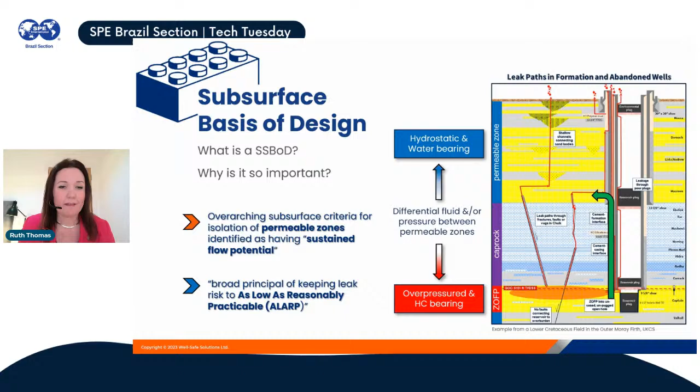So what are the regulations regarding the subsurface basis of design for abandonment? Well, actually, in short, there's very little. Most countries, as you'll probably be aware, have regulations regarding the integrity of wells in the context of the well life cycle, so that's from initial drilling all the way through to abandonment. But the maturity of specific regulations relating to decommissioning is generally linked to the maturity of the decommissioning industry in that country.

In the UK, well duty holders have to comply with the design construction regulations, which prescribe that we have to make sure that all wells can be safely suspended and abandoned with no unplanned release of fluids to surface. The OEUK, which is an organization which provides advice to the industry,

have developed guidance which is a bit more prescriptive in terms of giving advice around barrier lengths and means of verification of barriers. Whereas, as I believe in Brazil, the Resolution 46/2016 uses more goal-setting language around the objective of containment and using ALARP.

But all guidance that I've seen has fallen some way short of giving you a defined process in terms of how to conduct a subsurface review. So we'll take a look at that next.

So what are the steps? How long does it take? Well, generally, the duration of a subsurface basis of design for abandonment is commensurate with the complexity of the geology, of the wells, and also the availability or not of data.

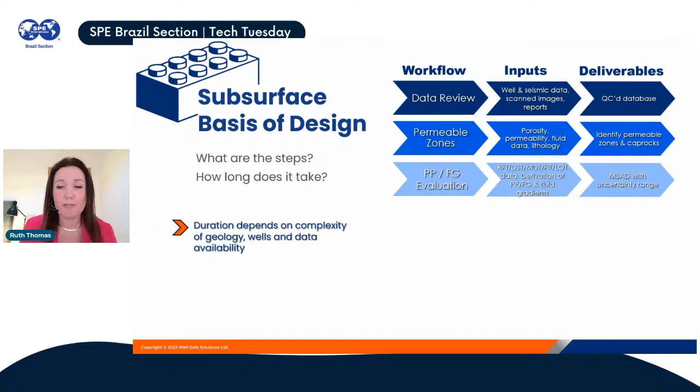This allows us to calculate a really key variable, which is the minimum safe abandonment depth. This is the depth above which the cap rocks are of insufficient strength to withstand the pressure exerted by the fluids in the reservoir.

We then can go on to understand our zonal isolation philosophy. What requires to be isolated from each other and from the surface? What is the likelihood of crossflow? What is going to be the pressure recharge of the reservoirs in perpetuity? And this gives us a real understanding of our isolation strategy.

We also need to understand the risks, not just the risks associated with the subsurface, like shallow gas, H2S, etc., but we also need to understand the risks of the chosen abandonment on any future reuse or redevelopment of the strata or the reservoirs, and carbon capture and storage is one of those opportunities.

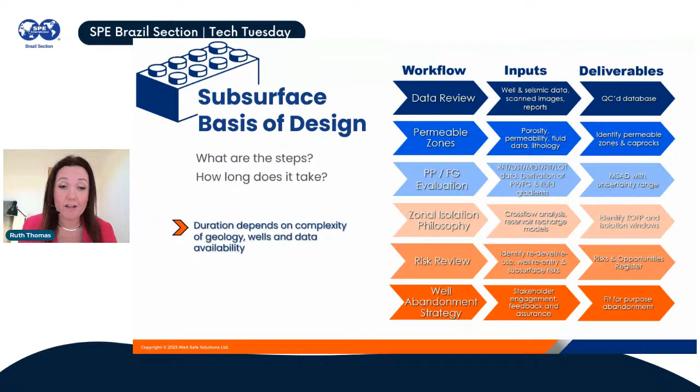Finally, we come up with our well abandonment strategy. This involves all of the stakeholders associated with those abandonments, so the well duty holder, the people executing the work, and the well engineering, to come up with a fit-for-purpose abandonment.

But we don't tend to do this in isolation. We do this process to build our subsurface basis of design for abandonment, which then forms the foundation upon which the well engineering piece is matured.

But as the well engineering piece matures and the well abandonment basis of design develops, things can sometimes be thrown into the mix, whereby we have to go back and look at the subsurface basis of design and come up with a plan B.

But if I were to give any piece of advice tonight, it would be 3 things. Well engineers tend to like to have similar data to subsurface people, so that's really one thing to concentrate on. They also need to understand the cap rocks available to them, where they can set their isolations.

So that's a really important part of this process. And then, as we've spoken about, the minimum safe abandonment depth. What are the boundaries and how are we going to achieve the isolation sufficiently?

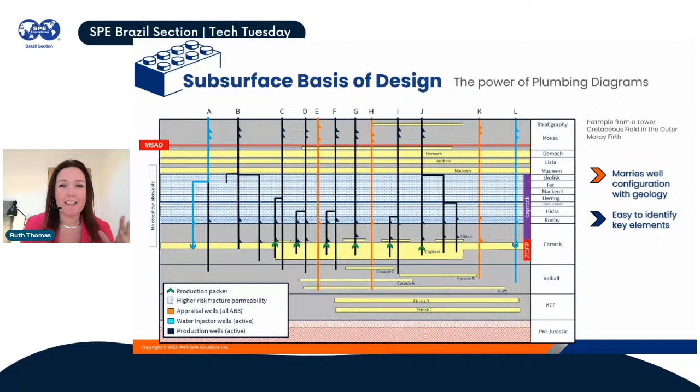Ideally, what you also want to produce is something called a plumbing diagram. This is a cartoon, really, which marries the well configuration in its very simplistic form with a simplified geology, showing those permeable zones, those cap rocks, and any other geological features. It's a really great way of understanding the key elements to the system that you're trying to abandon.

You can add in a bit more detail, potentially around what plugs are already in place, what issues there are, but also it means that we all have the same conversation around ensuring that we have vertical and lateral containment of the entire system, and we're not working in a postage stamp.

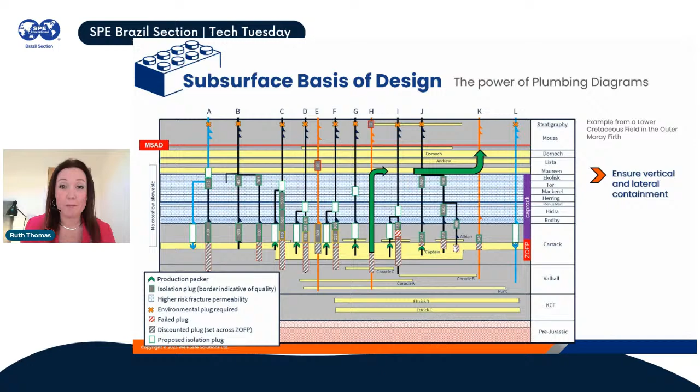So what are some of the challenges associated with a subsurface basis of design, and where is optimization possible? We've got 4 here today: data or lack thereof, subsurface uncertainty, managing risk, and flying solo. We'll take each of these in turn.

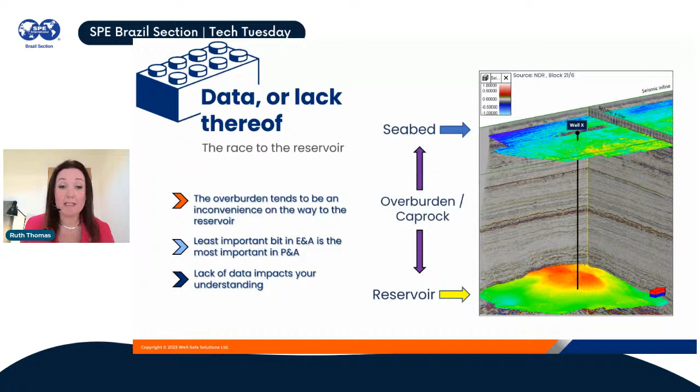So data or lack thereof, as I like to call it, the race to the reservoir. The bit between the seabed and the reservoir, that's your overburden, also known as your caprock. However, the least important bit in exploration and appraisal drilling is the most important bit in P&A. A lack of understanding of this interval can impact your abandonment design quite drastically.

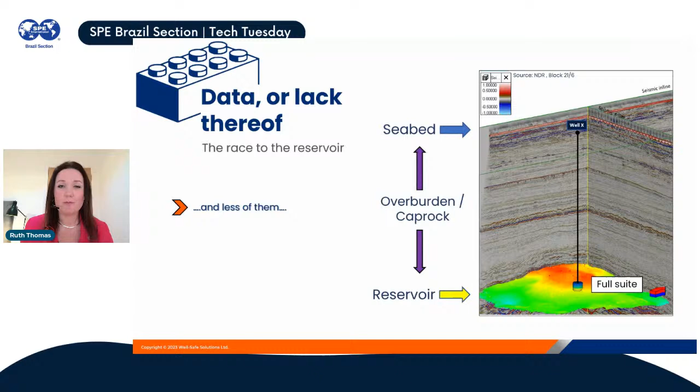We often acquire gamma ray, if we're lucky, sonic data from surface, and we potentially collect cuttings from 500 feet or so. But as the logs become more and more useful, we tend to acquire less and less of them until we only have a full suite of logs across the reservoir interval.

And the overburden can be really complex. As you can see from the seismic line on the right-hand side, we have many elements that can impact the effectiveness of our caprocks. We have polygonal faulting zones, so heavily faulted zones as a result of dewatering. We can have regional sandstones that sometimes connect wells in the shallow zones, and we can have gas hazards, for example.

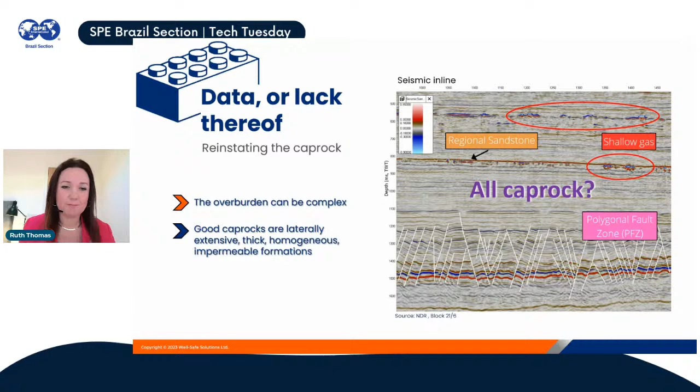Good caprocks are laterally continuous, they're thick, they're extensive, they're crucially homogeneous. But as you can see from the graphic, that's not always the case. And often we make assumptions around caprocks that can be misleading.

The isolation windows are a key deliverable from the subsurface basis of design, but actually in reality, we can have a lot less of it to use at our disposal for abandonment purposes.

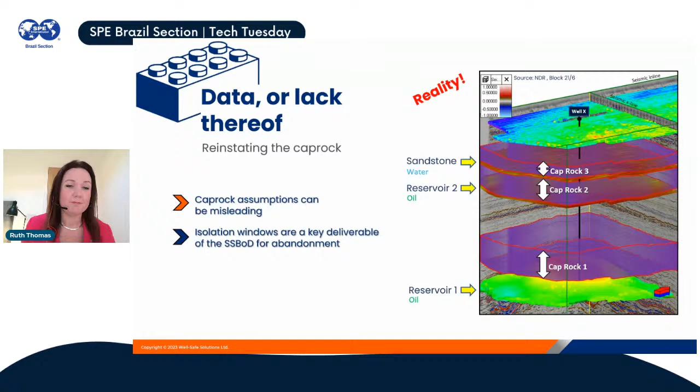Moving on to subsurface uncertainty. Without hard data, we introduce uncertainty. What's really going on between these clusters of points? Without data, we have to make assumptions and give a range of outcomes. I'm going to give you an example of how we did that on a recent project.

This is a well that we have just finished abandoning for a client in the central North Sea, Decom 22. The well was drilled in 1998 and was suspended with 5 plugs: 3 across the primary reservoir, 1 across the chalk interval, and then a suspension plug.

The well encountered a Fulmar reservoir, which was oil bearing, and there is also a secondary reservoir in the shallow zones, connected to a nearby field, with offtake currently happening from that field. The lower reservoir was HPHT conditions, 15,000 psi at 12,500 feet TVD subsea and 360 degrees Fahrenheit. But it was never developed, so we can assume this reservoir is still at virgin pressure.

None of the plugs here were tagged or tested, so there was some ambiguity around how effective these were.

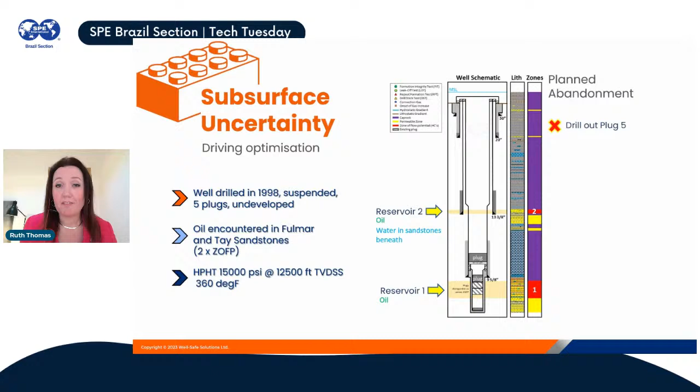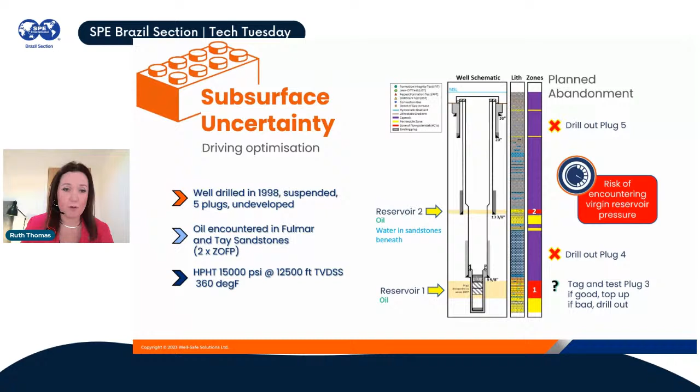The planned abandonment, as per the basis of design, was to drill out plug 5 to re-enter the well, automatically drill out plug 4 set across the chalk interval, and go tag and test plug 3. If it was good we would top up this plug, but if bad we would have to drill it out, which meant running the risk of encountering virgin reservoir pressure. The planned abandonment was then to set or top up that primary reservoir barrier.

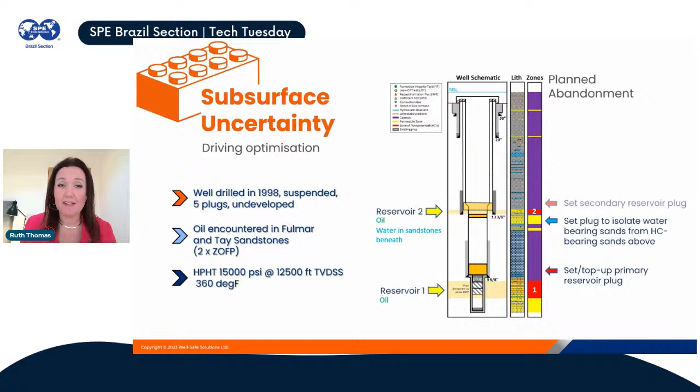Then in accordance with OEUK regulations, we had to set a plug to isolate water from oil-bearing sandstones in the secondary reservoir, and then set an environmental plug for wellbore containment.

During the subsurface basis of design for abandonment process, you can see I've added on the right-hand side a plot, which is your pore pressure fracture gradient plot. Everyone will be familiar with these for drilling, in terms of deriving what pore pressures we're likely to encounter in the well. And we're back to having clusters of data with big gaps in between them.

With this, we have to draw on trends, so we can add a pore pressure trend. Our pore pressure is derived from RFT, MDT, DST data, or from sonic or resistivity logs. We can add on our fracture gradient pressure, and this comes from our direct measurements during drilling, our leak-off or extended leak-off tests, and our formation integrity tests.

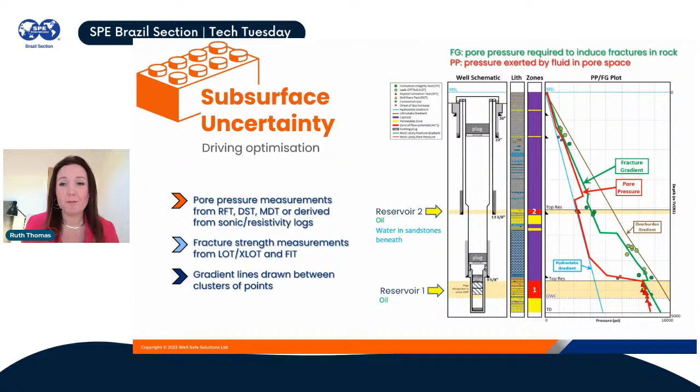But again, we have to make assumptions. As you can see on the data here, there's a range of points and a range of data inputs, but we have to make an assumption. When you add on our oil gradient lines from the top of the reservoirs, the intersection point with the fracture gradient dictates this minimum safe abandonment depth I referred to earlier. This is the depth above which the caprock is not of sufficient strength to act as a seal. So it's a really important thing to get right.

You can see that the intersection point of the oil gradient with the fracture gradient gives you a minimum safe abandonment depth, which is just beneath the base of plug 4. So in this instance, if we were looking at this in isolation, we would have to drill out this plug because it doesn't comply with regards to the minimum safe abandonment depth.

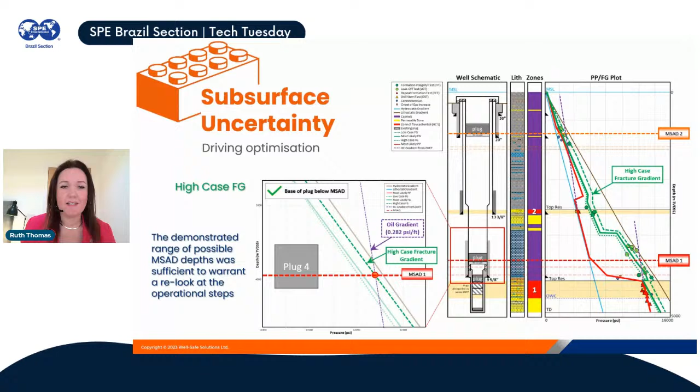So what did the optimized abandonment look like? We would still go in and drill out plug 5 to re-enter the well, but we would go and tag and test plug 4. If it was holding pressure and there were no issues, we would leave it in place. And this would remove the lower scope entirely.

We also then did the detailed evaluation of the geology around this reservoir number 2, and we discovered that there wasn't sufficient caprock in order to isolate between oil and water-bearing sandstones. And so we were just placing one plug here inside the 13 3/8 shoe. So that simplified this scope as well.

As you can see, we saved some money for the clients, but crucially, we actually reduced operational risk significantly because we weren't exposing the well, the formations, and the rig to that virgin pressure, which was HPHT.

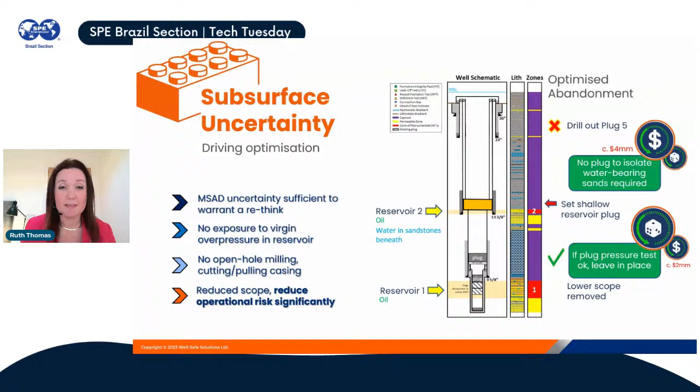So the next challenge, managing risk, the less than perfect abandonment solution. So what do I really mean by that? It's the difference between what we'd like to do versus what we can realistically achieve, operationally achieve.

So the subsurface basis of design for abandonment may require us to set an isolation just above the reservoir to stop cross-flow of hydrocarbons into shallower sandstones, for example. But what if you can't do that? What if the risk of re-entry into the well is just too high?

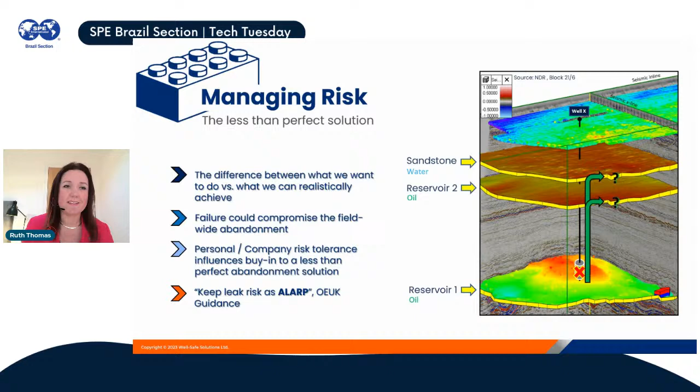Often the risk profile of the well duty holder strongly influences their ability to buy into a less than perfect P&A solution. But we really need to keep ALARP in mind when it comes to this. And I'm going to give you an example of how we did that in a recent project.

So this field, which encompasses 12 wells across the entire field, is really old. It's a very well-established field in the North Sea. It's about 40 years old, and nearly all of the wells that penetrate the field are in really poor condition in terms of their integrity.

There's a lower reservoir, which is in the Devonian, and then a very small, shallow accumulation just in the Paleocene interval above the field. The original field was overpressured, but it's been heavily depleted by about 4,000 psi due to production. The initial subsurface basis of design for abandonment was done by the subsurface team in the client's office back in 2017, so some time ago now.

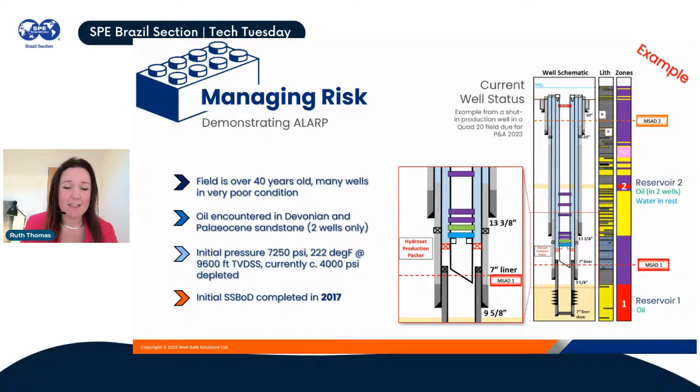And just zooming in a little bit on the completion area within the well, you can see that the minimum safe abandonment depth, which has been calculated for the primary reservoir, sits just beneath this hydroset production packer, which is in the well. And that's key, and I'll come on to speak about why that is in a second.

This is the plumbing diagram associated with the field. And again, we've got this lower, very prolific Devonian reservoir. We have the overburden, which is very sandy in this instance. And in between, we have the chalk, which is common throughout the North Sea and commonly forms part of our caprock. You can see that there's been a few issues with the field over the years. We've had an underground blowout, and there's only the appraisal wells which have actually been plugged off. So the rest of the well stock is open and ready for abandonment.

And just zooming in a little bit on this interval, you can see the minimum safe abandonment depth is calculated to be beneath the depths associated with these production packers.

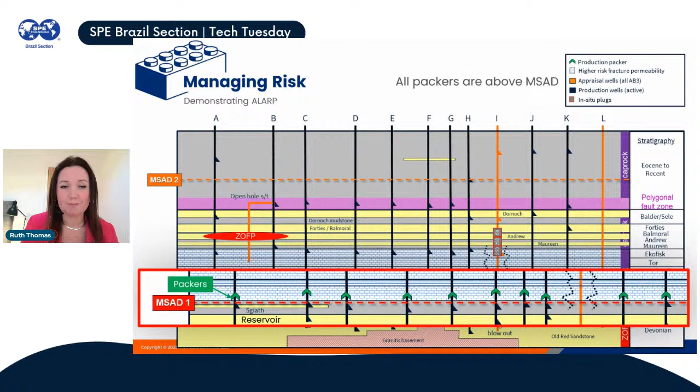So the idealized abandonment was to remove the production tubing and that hydroset production packer. We were then going to mill a window in the 7-inch liner and set a rock-to-rock barrier across the shale caprock there. We would then look at the shallow zones and verify the annular seal in the wells and set a secondary barrier where required.

However, and it's a big however, as the well engineering piece progressed in 2022, so some years later, the integrity issues that were identified in the well meant that we had to have a complete rethink of the abandonment.

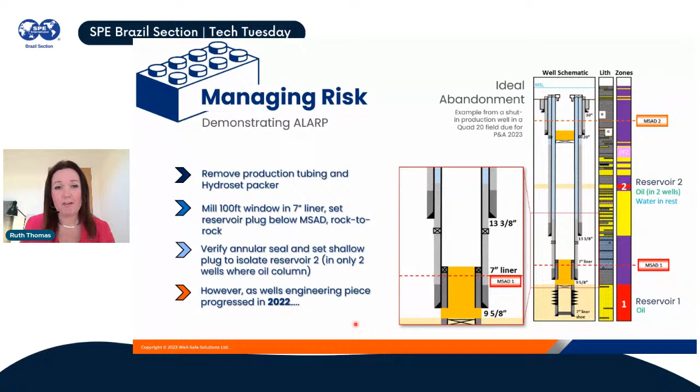The removal of these hydroset production packers was deemed to be almost impossible, and it could have ended up in sidetracking the well or having to set barriers well above the minimum safe abandonment depth, so in essence not isolating the primary reservoir. So what did we do?

We held a workshop with the client with all the stakeholders in place. We called it an ALARP workshop. That was designed to enable everybody who was involved in designing the abandonment to sit in the same room and come up with a plan B. And the plan B looked like this.

It was basically to leave the packer in place and to do a through tubing plug. However, that did mean that we couldn't log the well prior to setting the barrier, and therefore we wouldn't be able to make sure that the annular isolation, so the annular cement, was good enough to act as a barrier to any migration of hydrocarbons through any microannulus that may be present.

So the subsurface was brought back into the frame again. We had to go away and do a shale annular barrier study to actually look at the mineralogy of the shales in this section and look at their likely swelling and creeping potential to ensure that we had some idea whether or not the annular isolation was verifiable.

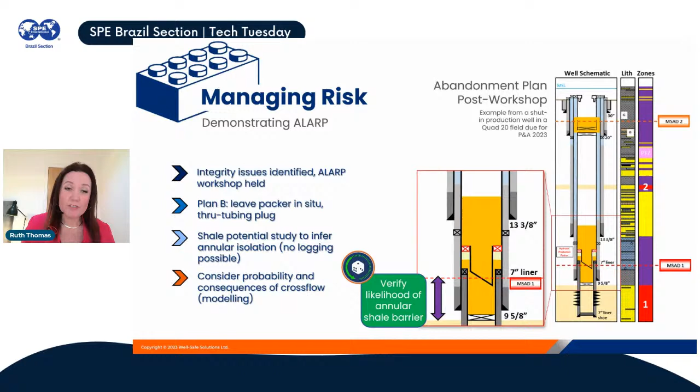We were also tasked with looking at crossflow from the reservoir into the shallower zones should any of these barriers fail in the future, and quantifying the level of risk involved.

So this was really just an example of how the subsurface basis of design for abandonment was completed in 2017. And yet in 2022 and 2023, it was brought back into the fore and was actually used to enable a plan B to be devised for abandonment of this field, to ensure, crucially, that we have not just vertical but lateral containment.

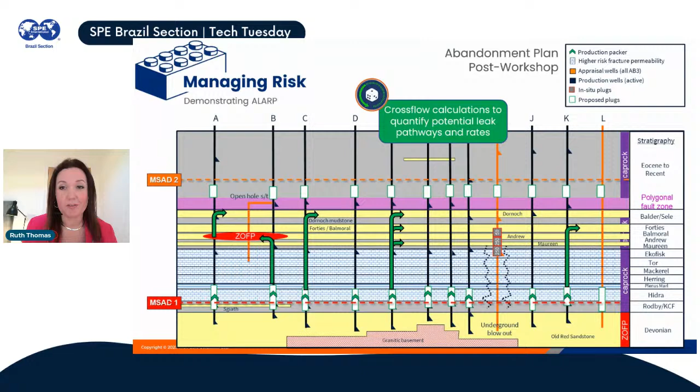So managing risk, how do we do that in the subsurface basis of design for abandonment? Ideally, if you have the resources, you acquire data in advance of P&A, whether that's pressures, samples, or logs, to fill in the gaps about your overburden and ensure you have the data you need to optimize your abandonment.

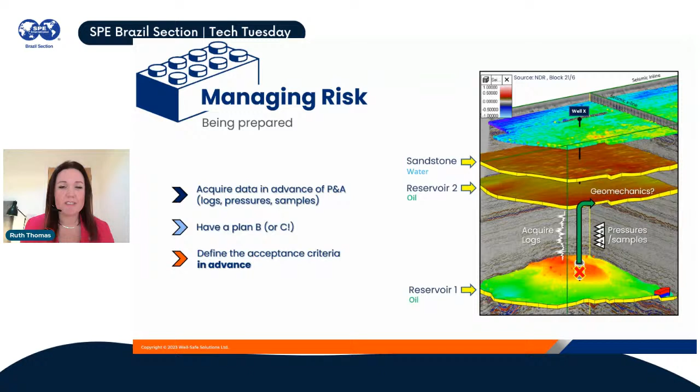We need to have a plan B, or even better, a plan C when it comes to abandonment. There are so many unknown unknowns when you come to operations. Some things you've never even considered and the operator is also unaware of. So having an alternative and getting buy-in from all the crucial stakeholders, with acceptance criteria defined upfront, will save a lot of time and heartache and money in terms of management of change during operations.

The last challenge we face is flying solo. Everybody likes to hang around with people that speak the same language as they do. However, silos, despite being commonplace, have to be overcome if you really want to optimize P&A and get everybody working in the same room. In Well-Safe, we have the subsurface team and the well engineering team sat together, co-located, having those conversations and drawing those plumbing diagrams.

We also need to have dedicated resources for P&A. I always akin it to having a Lego head that you kind of pop on and off. If your team are distracted with barrel adding opportunities, that will always come first, and P&A will always be something that people will kick down the road.

I believe it's really important to build relationships and technical understanding between subsurface and well engineering. This enables us to speak each other's languages and go forward with a P&A design which everybody can get behind. Subsurface people really need to communicate the uncertainty early. We're really good at this in exploration and appraisal drilling. We should apply it also to P&A.

So in summary, P&A needs to be optimized if we're going to ever reduce the costs of plug and abandonment of wells. The subsurface team developed the subsurface BOD, which underpins the P&A design, but there are many challenges along the way, including a lack of data, managing risk, and uncertainty. But optimization can save you time, it can save you money, but crucially, it can reduce operational risk.